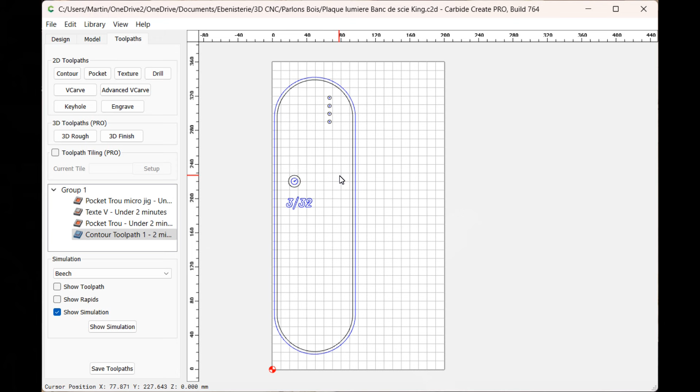Okay, so let's continue, or I would prefer to say, let's start the project in Carbide Create. You already have the example of the final result we want to do, so I will show you how I obtain that result. You have to create a rectangle, and that rectangle has to be the size of your hole in the table saw. So let's apply the width and the height that is concerned.

Over here I just copied my numbers, and then I will apply a fillet that will put a circle around it, around my rectangle. And that, by the way, I will give you right away. It's 44, it's half of the size, and this is going to create a perfect circle around my rectangle on both ends.

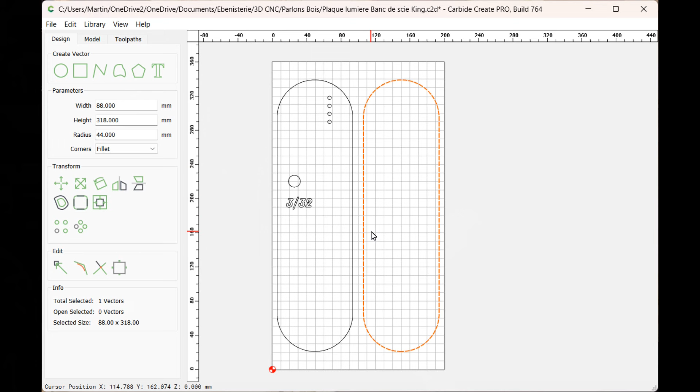Let's center it in the piece approximately, but as you can see over here, this is going to be a template where I'm able to do two at the same time. It is not necessarily what I'm going to do, but yes, I can put both at the same time.

Now I'm going to create the small hole for the MicroJig splitter, and I'm using some measurements that I did millimeter precisely, and I'm putting the hole where I need it. I need 4 of them, and they need to be aligned. But at first, I'm not aligning it right away. I'm going to do that afterward.

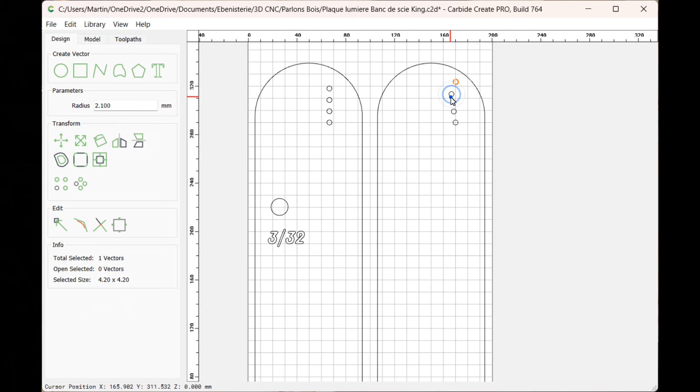So yes, let's select them one by one, or effectively 4 of them at the same time. And by centering it, the distance between each of them will be equal. And I'm also aligning them to be in perfect alignment with the blade.

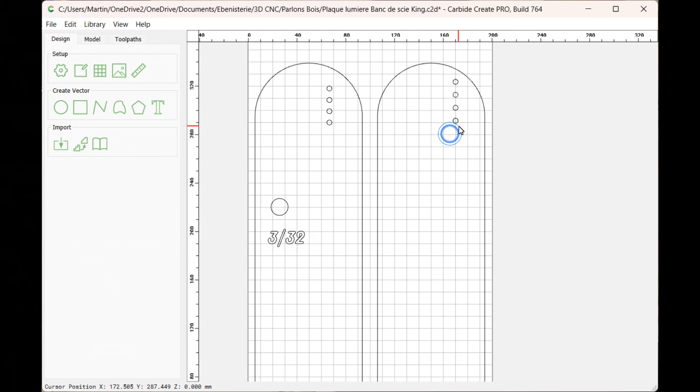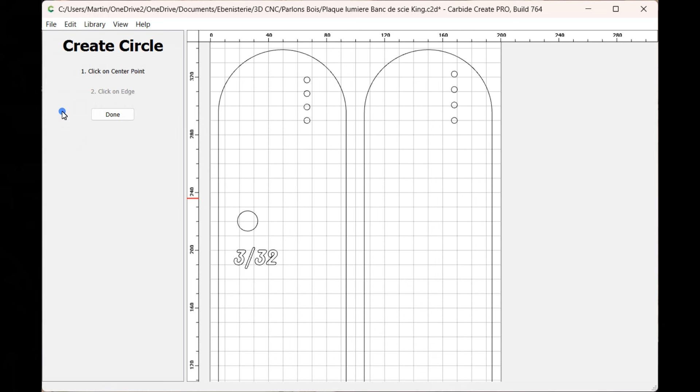I'm not really worried about if it's perfect or not right now, because at first I will create my first prototype that I will test on the table saw in order to verify if my holes are perfect or not. And since I have many other things to test at the same time, that prototype is going to verify everything, and then I will probably create a second template, a second prototype, in order to verify if all my changes are correct.

I created also the hole to put my finger when I want to remove the plate from its place. And then I'm going to create the text I want to put, because since I have two sizes for blade, 1/8 and 3/32, the thin kerf, I'm just going to put the text of the template I'm creating.

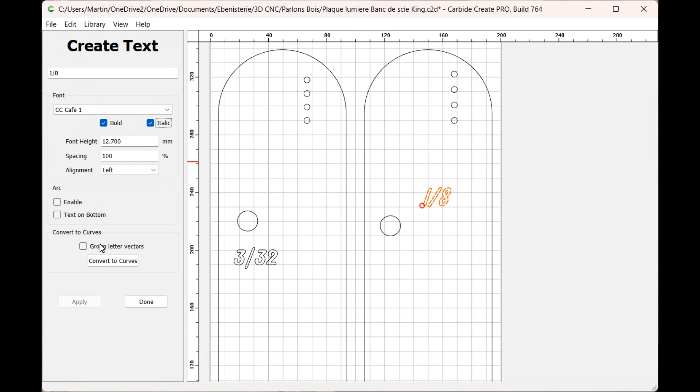You can select whatever font you want. I decided to make it bold and italic, and that's it. There are many other things that you can explore, but this is really simple.

So all the holes are now perfect for the job to be done.

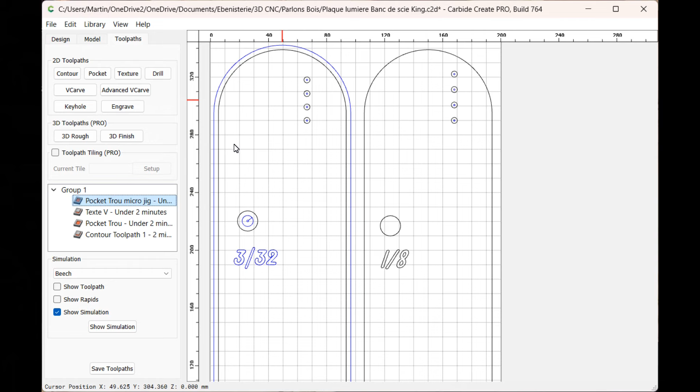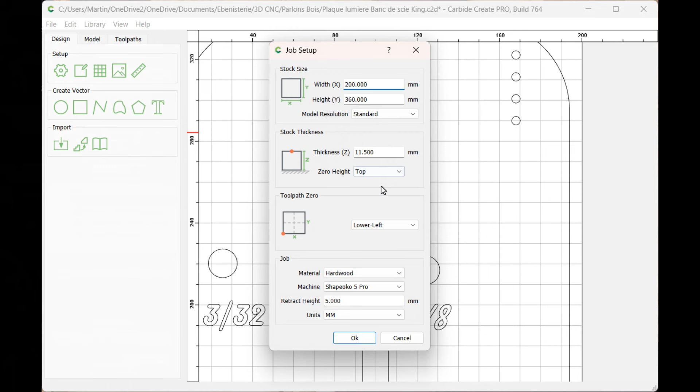Okay, now the toolpath. I'm going to select a different toolpath depending on what I have to do. Let's say for the hole, for the micro jig hole, it will be using the 1/8, and I'm going to use, yeah, you see the thickness of the board. What I'm taking over here is I want to do the hole exactly that thickness. So for the toolpath of whatever I want to do as the thickness, I'm going to put a T into it. And that will tell me that I have to go exactly through all the thickness of the board.

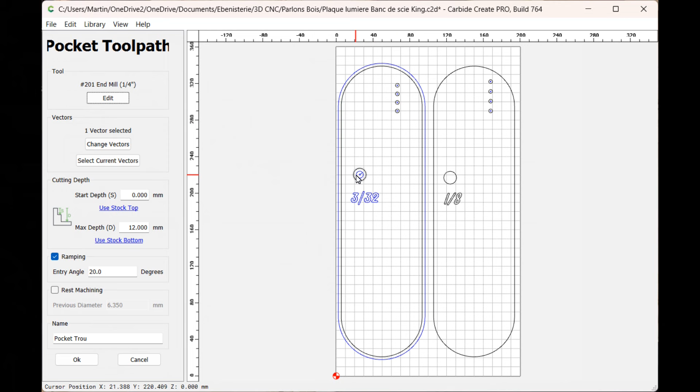For the text, it's a V carve, only 2 mm. And now for the big hole, again, it's going to be whatever the max depth could be a little bit. It could be T for the thickness, or I saw it was 11.5. It could be 12 in order to go through. See over here the contour, I put T. There is different way of doing it. It's going to be outside in order to make sure that I will keep exactly the size I've written. And since I have the Pro version, I'm using the ramping.

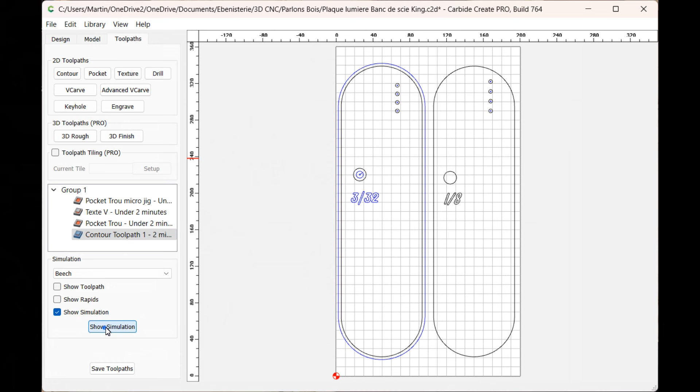So let's look at the simulation, and you can see it's complete on the left, and I did not do it right now for the right. I'm going to do that later. Let's save the toolpath, save the file, and now let's produce the first one.

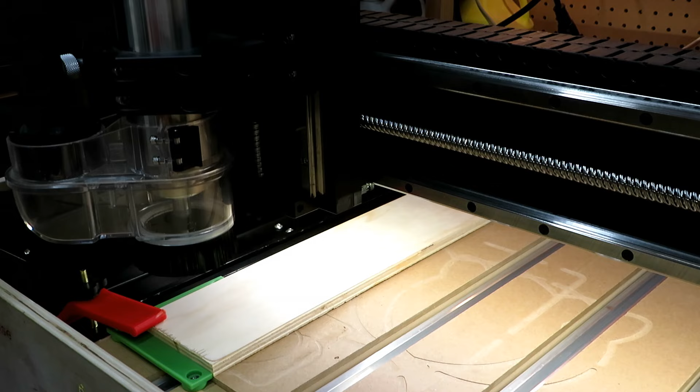And, oh my God, oh! The first time I designed it, I was not in the right direction. So I switched my design, and now I restarted. And guess what? My X is not at the right place. I have a small board, so yeah, this is a problem. You can even see the line because I decided to move the CNC to the X and Y 0, and it went through it because I was too low. Now, perfect, I'm correct, and it's exactly what I want to do.

So I'm doing the first toolpath around at 1 mm. My goal over here is as soon as I have the design, I will be able to test my metal plate in order to see am I having the right size, because I don't want to go cut through all my wood yet. Let's say my design is not perfect, I can wait.

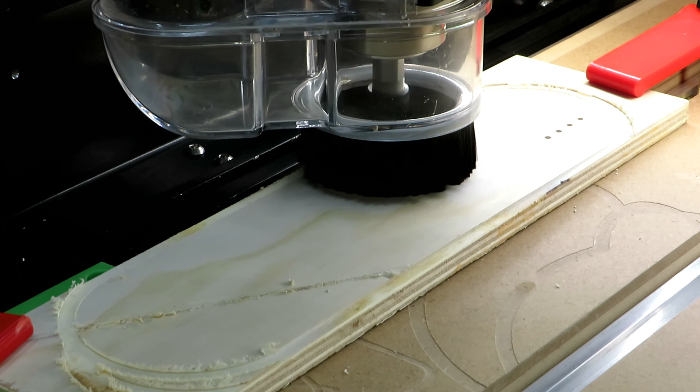So I restarted the job because I tested my metal plate and it was correct. And now I'm writing my text, then the holes, and the last step will be to cut around exactly through the thickness of the wood in order to have really my prototype in my hand to test that on the table saw.

So you use a smaller blade. You need a smaller one. The 10" is going to touch the wood. So I had to switch to a 7 1/4. And when I'm pulling it up, you can see it's making my hole. And I will stop and check my alignment. I was not perfect. So I did my change in the software and I recreated a second prototype. In fact, this one was correct.

And here is me producing it and redoing exactly the same test. So I did a little bit with the 7 1/4, and then you can see over here I remove it and put the 10" into it, and I will be able to complete the process with that 10". This time I was able to confirm that everything was fine. Yeah!